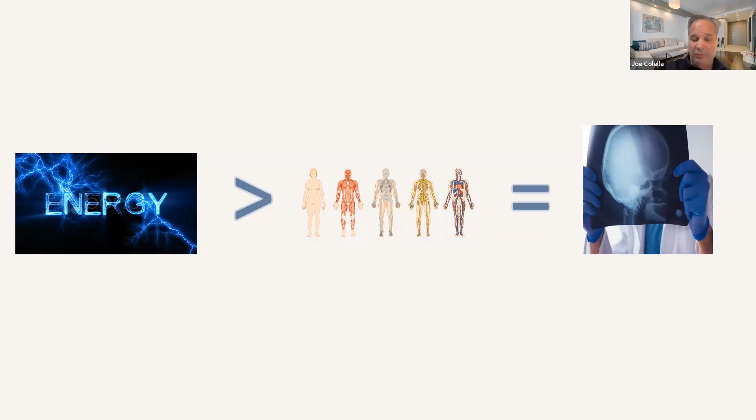So with that said, I just want to give you a mantra to think about as we talk through this: energy, when transferred to human tissue, is what causes injury. That energy can take a lot of different forms—chemical, electrical, mechanical, thermal, nuclear, gravitational. We're going to focus, in this session and whenever we're doing child passenger safety, on crash energy and crash force. That's really what we're trying to solve for: how can we control that energy, how can we manage that energy? And car seats do a great job of that.

But the goal is to reduce the amount of energy experienced by the child, to redistribute that, because reduced energy means reduced injury. That's really what they're trying to do through these designs.

When we're thinking about the innovations and the things that are making differences in the car seat world, there are really three basic areas that cause these improvements, that cause these car seats to become safer. And that is having better innovations from manufacturers mainly, where they're able to design something that either takes out misuse or improves the way crash energy is managed.

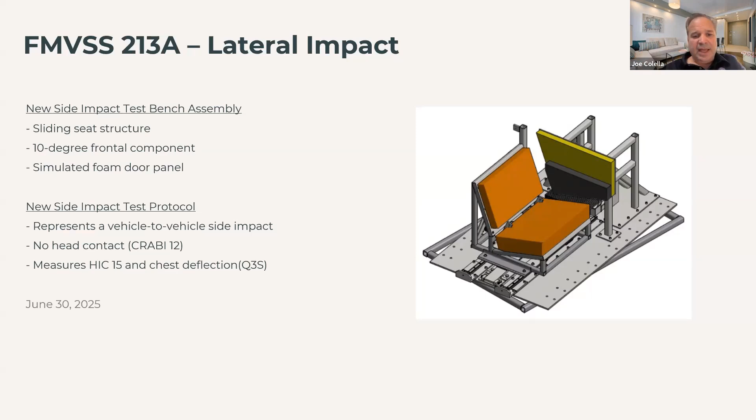So that's coming again in June of 2025. All manufacturers will have to meet that with all car seats made on or after that date. It is not retroactive. And then in 2026, December 5th of 2026, about 2 years from now, we're going to see a new frontal impact standard.

Really what NHTSA has done is they've changed the bench, and you can see an image of it on your screen. The current bench where car seats are being tested is based on a 1974 Malibu. We're not seeing car seats in 1974 Malibus any longer. So what they've done is they've looked at current vehicles, and the current seat back and seat slope angles are one thing they looked at. They found that current vehicles have thinner cushions and denser foam instead of really fluffy cushions like they used to have in the 1970s. They're also going to be testing with a lap and shoulder belt instead of testing with just a lap belt, like they have been up until now.

There are going to be new weight rating guidelines, and I'm going to add one more in. That I already told you about: the 26.5 pound minimum for forward facing and the 40 pound minimum for booster seats. But they're also adding in that a rear-facing only seat or an infant seat rated below 30 pounds, so that's the maximum weight allowed by that rear-facing infant seat, has to be tested with the CRABI 12-month-old only.

If they want to rate higher than that, so a 35-pound infant seat or a 40-pound infant seat, which we as technicians have seen, then they also have to test with a 3-year-old dummy. Most manufacturers that I've interacted with have decided they're going to drop their infant seat maximum weight to about 30 pounds instead of trying to cram a 3-year-old into an infant seat.

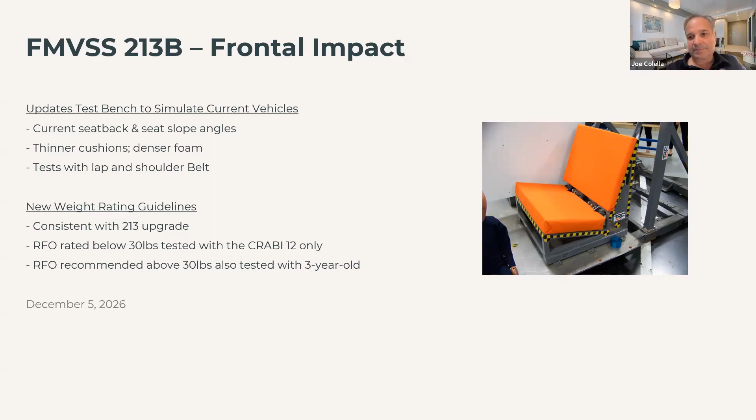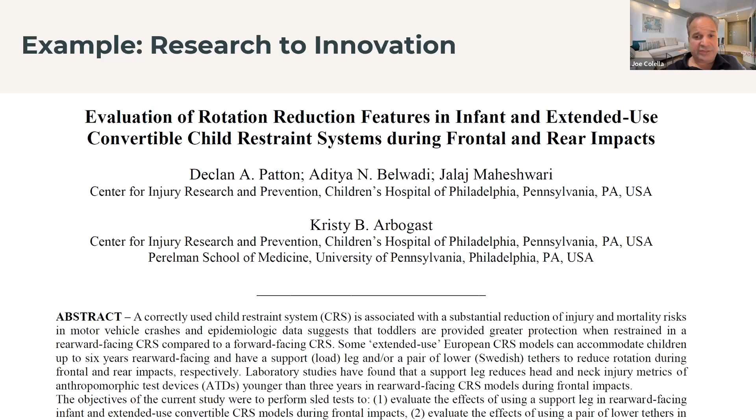Another quick example is research to innovation. This is one of many studies we're constantly looking at that examined rotation reduction features. Those could be load legs that reduce the amount of rotation of a car seat, or other features like load legs to stop the car seat from rotating or control that rotation, or rear-facing tethering. We've seen a couple of innovative models that allow rear tethering for that same purpose, to stop it from rotating.

European shoulder belt routing is another way it's being done, where the shoulder belt is wrapped around the back of the shell. A new study being published next month shows that having the car seat shell in contact with the vehicle seat in front of it has the same effect as a load leg, and can also be useful in controlling rotation and distributing forces in a better way for child injury.

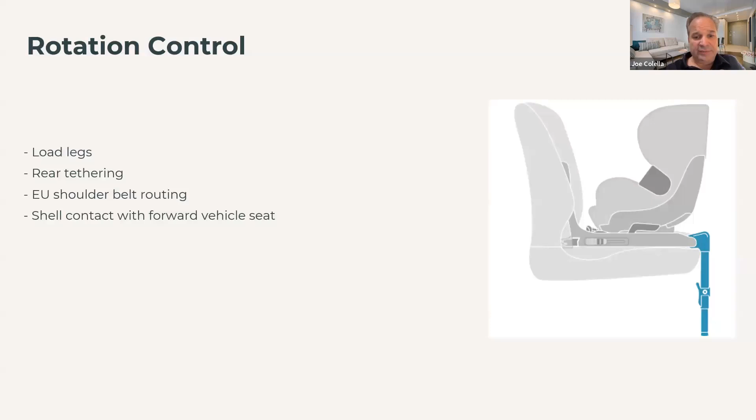Another set of research to highlight quickly is the forward motion of the child seat. We've got lots of research showing that tethers improve the ride down with the vehicle and reduce head excursion that the child experiences. We're also starting to see a couple of models that allow load legs to be used forward facing, and Shai will talk to you about that from his perspective in a couple of minutes, which has a similar effect to tethers, but sometimes in an improved way for certain designs.

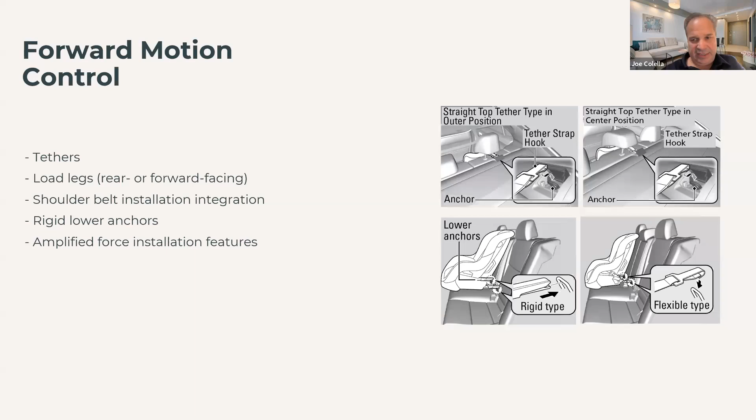Shoulder belt installation integration, where they're going to be testing with lap and shoulder belts both, integrating that shoulder belt into the belt path, so the shoulder belt is high on the car seat, can have almost a tethering effect. Rigid lower anchors mean essentially no motion of the car seat at all, so a very good ride down with the vehicle. Even some amplified force installation features that help us get a tight installation, especially with a seatbelt, can reduce forward motion.

And then ease of use. A correctly used car seat is a safer car seat. So making it easier for parents by using color coding - rear facing and forward facing have different color codes. Device-assisted installation, car seats that help you make it tight without exerting more force. Lower anchor designs that make it easier to attach or detach the car seat is also an improvement. And then improved instructions, which could be interactive instructions or more graphic instructions using pictograms.

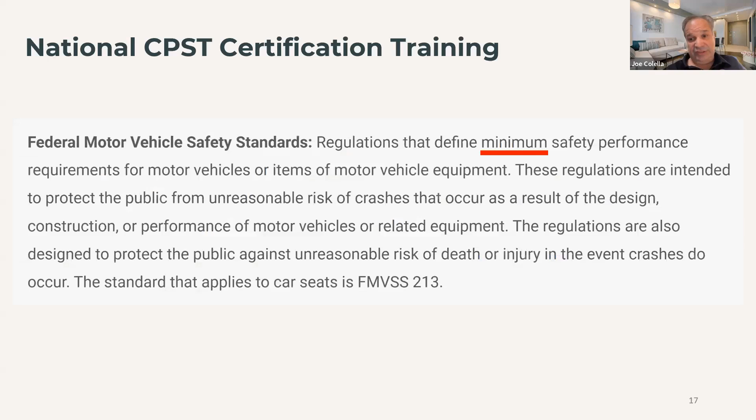Just to put that in perspective, all car seats meet federal motor vehicle safety standards. Some of them go way beyond those minimum standards and make their car seats far safer than required. There are some good resources for the parents and for the techs on this call.

The bottom line is, regardless of what car seat you have, which one you select and which features it has, you have to use it right. And that includes, from the standardized curriculum we learned as technicians, selecting the right car seat, facing it the right direction for the child and for the car seat's design, locating it in a place appropriate for crash protection. So it could be the rear middle, back, or definitely the rear seat away from airbags.

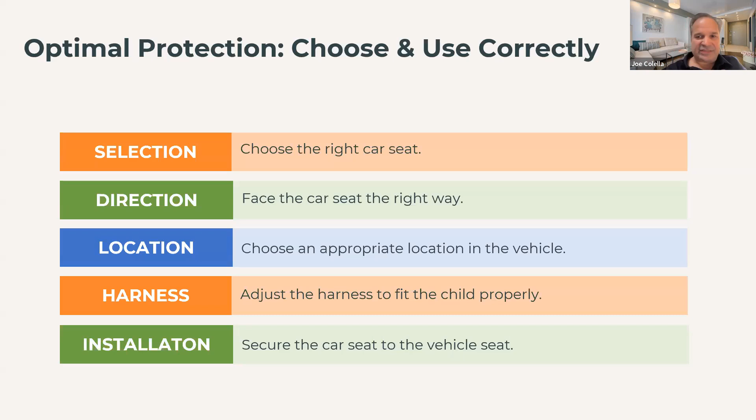The harness has to be adjusted to fit the child properly according to the instructions. Car seats are designed and tested a certain way, and that's what the instructions reflect. Installation has to be appropriate the way the car seat manufacturer said to do it, and also the way the vehicle manufacturer said to do it. So that's the key, regardless of what car seat you're using.

So with that, I'm going to turn it over to Shy, the president of Babyark, and let him talk to you about how they're applying these concepts that I just talked about.

All right, thank you, Joe. Thank you very much. So before diving into the presentation, I'm Shy Mindel. I'm the CEO of Babyark. I'm 45 years old, I have 3 kids. My background is I'm an aeronautical engineer. I actually started another company that designs and manufactures energy absorbing seats for military and aviation applications.

Based on that background, we thought, why not take the technology that we invented for aviation applications, for example, and put that in car seats. So the purpose was to simplify the installation, to have a better ease of use, and to implement some new technologies into the protection of the kid.

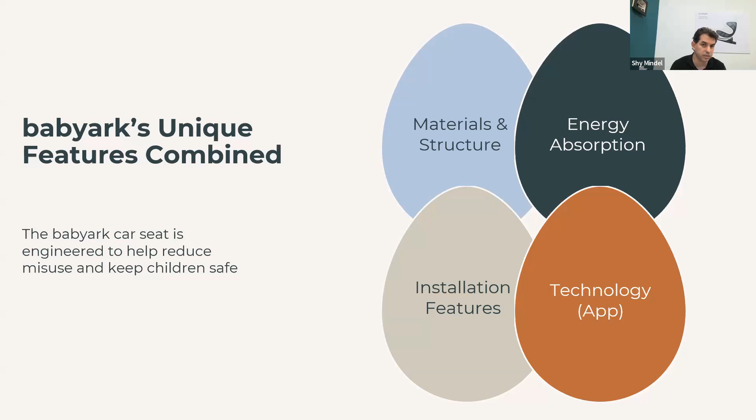I'll try to elaborate a little bit on what we're trying to do here on the car seat design. We are focusing, on the Babyark car seat, on the energy absorption, the materials and structure that support that, installation features that help you minimize misuse, and as Joe mentioned, a correctly used car seat is a safer car seat because it's actually used as tested, so that's super important, and how technology today can help us with everything, with the usage of the car.

So I want to show you a few things. As I mentioned, I'd say we specialize in energy absorption. We invented a new energy absorption technology, and I want to show you how it works.

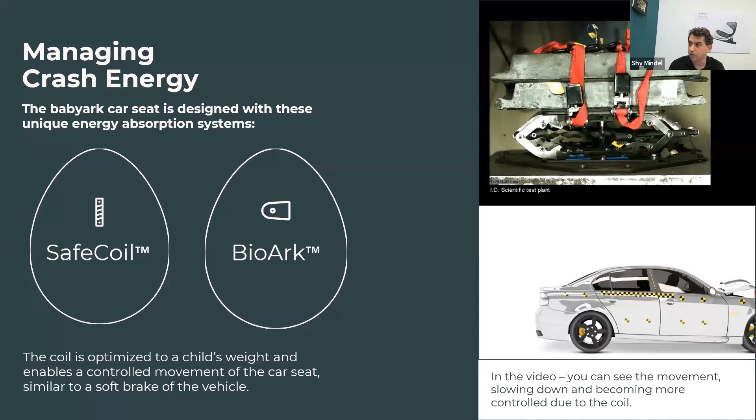So we implement the technology in the car seat. On the top, you can see a video. You can see this is approximately 220 pounds of weight. I'll show it again: you can see how the energy absorbing element is extended, and how it reduces the speed and gives a softer absorption of the weight. That's what we're implementing in the car seat itself.

You can see during an accident there is a base in the seat, and we'll discuss that. So the base includes the energy absorbing element, the same element you've seen before, and it absorbs the energy during a crash. Think of it like a soft brake versus a hard brake of a car, or a crumple zone. Basically, you want to divert the energy to different elements around the kid. The amount of energy in every crash is finite, so if you can absorb the energy with other elements, it's going to reduce the forces transferred to the kid. So this is the main element responsible for reducing the energy or forces transferred to the kid in a frontal impact.

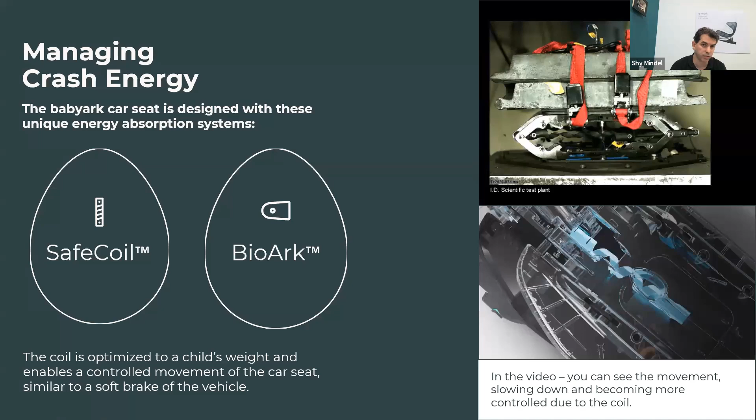Now, the way we do it is basically the technology allows us to optimize the performance of the energy absorbing element. Again, just like a crumple zone in a car, the crumple zone is designed for certain forces, for the mass of the vehicle, and the adults that we want to protect inside usually.

So what we wanted to do is optimize an energy absorbing element that can fit kids from newborns to 6 years old. What I'm showing here is basically we have a lot of control over how the energy absorbing element behaves, and we can do that through simulation and testing. This is what we've tried to do to optimize the performance for newborns to 6 years old.

So the criteria, according to the regulation, is exactly a HIC level of 1,000, and the lower it is, the better. What we're showing here is that we are approximately 75% lower than the requirement by the regulation.

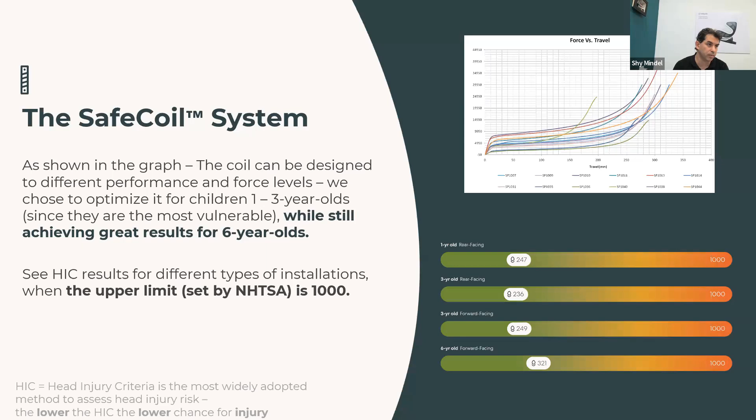What we want to do is find an optimized place for kids between 1 year old to 6 years old. In the design, we try to provide better results for smaller kids because they're more vulnerable. Head injury is more predominant with kids, so that's what we try to do with smaller kids.

Another aspect is side impact protection. This is one of the more common accidents that we can see. Regulation addresses that, and I think it's super important. What we try to do is kind of biomimic a very good solution.

What you see here is the internal structure of a woodpecker. A woodpecker has an amazing brain protection mechanism that diverts a lot of the forces around the brain. You have a spongy bone that distributes the forces, reduces the forces on the woodpecker's brain, and basically woodpeckers can peck the tree thousands of times a day with no brain injury.

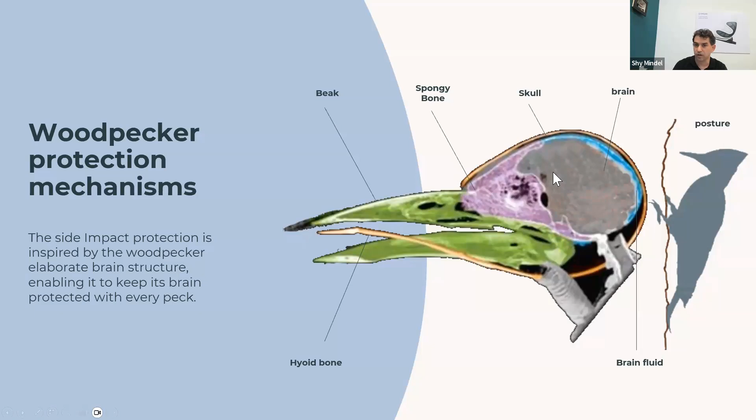If you think of football players, you know there are internal concussions, and that's something we wanted to implement in the car seat. I'll just show very briefly how it looks.

During a side impact, we have an energy absorbing element. It's kind of a wing, you can think of the beak, that is protruding to the side of the door. During an accident, that absorbs the energy and diverts the forces around the kid to the side, and reduces the amount of energy transferred to the child.

There is more to that, but this is just a small demonstration of how it works.

Now it's very important for the seat to be correctly installed. It's very important that the forces are diverted to the energy absorbing element in a controlled manner. So what we wanted to do is rely on proven methods to connect the car seat to the car. We wanted to isolate the car seat as much as possible from the car itself, because if we're relying on vehicle cushions that can change from manufacturer to manufacturer, we're not going to have constant performance in each crash.

So what we're using is elements that are proven to improve safety. We're using a support leg as an anti-rotational element. We have rigid lower anchors combined with a seat belt for redundancy, and an anti-rebound bar that improves stability and prevents rotation on rebound or rear impact.

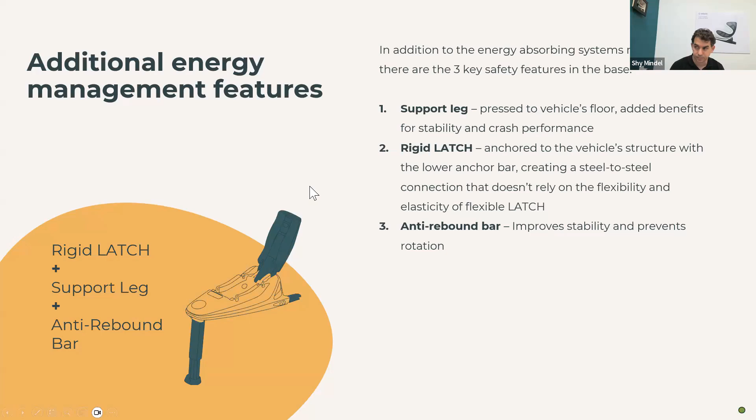The redundant seat belt can be used. It's not common, but it's used in several car seats. The Clek Fllo allows that. The Nuna Pipa and us allow that kind of installation.

The redundant seat belt is Joe's area - you want to elaborate a little on that?

When LATCH was being introduced, there was an International Standards Organization working group for LATCH, a group of manufacturers that were asked: is there going to be a problem with using the seatbelt and LATCH together? The three concerns they came up with at the time were: the possibility of LATCH hardware contacting the vehicle belt and buckle, causing the webbing to fray or weaken over time from rubbing; the possibility that the vehicle belt and LATCH anchorages might not be collinear, coming from different angles, which could change the performance of the car seat; or the possibility that using both would make the installation too stiff, so it would not perform the way it was intended. So those were their concerns at the time.

And Shy will talk to you about why that doesn't apply here.

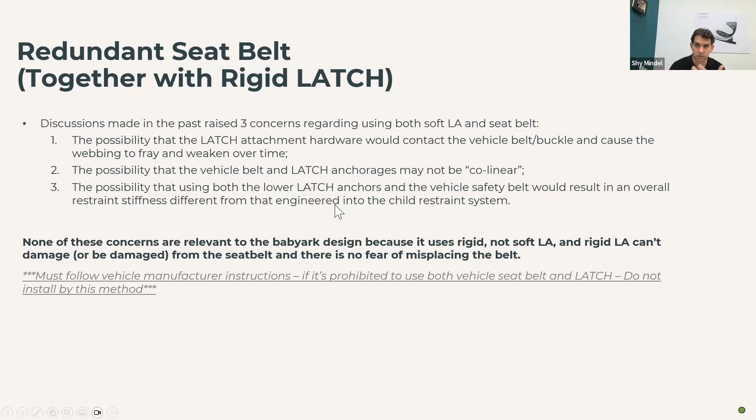None of these factors apply to BabyArk. It was tested for a redundant installation. We have a very clear tunnel for the belt, so there is no way for interference between the rigid lower anchors and the belt. The car seat needs to be designed in order to be installed like that. It has no interference, and it actually adds safety. This is why we want the redundant installation.

Now, what we try to do in Babyark is try to implement the best practices of installation, energy absorption, in order to kind of provide a safer solution, or as safe as we can.

So we are using rigid low anchors. We are using a support leg. The support leg is used instead of a top tether, and I'll show that in a crash test, but the seat does have a top tether because we must have that in order to comply with the regulation. So you can install that with a top tether or with a support leg. Both of them are good. Our test results show that support leg provides better results, and I'll show you why.

High rear facing limits, rear facing installation kind of distributes the forces better on the child's back, so it's recommended. We have the same installation for rear facing and forward facing. The base is the same. I'll elaborate on that, it's a smart seat. It has 14 sensors that guide you through the installation process in order to minimize misuse. And we're trying to use the best practices regarding the instructions from NHTSA about the weight and etc.

So the rigid low anchors provide stability. It's a steel-to-steel connection to the car. And what happens during a crash? We have the same forces transferred to the energy absorbing element in each crash. So when you have a webbing, the webbing itself extends a little bit. So the tension is different, so it's going to extend differently. So it's going to affect the crash performance, and it's kind of depending on the user who installs the seat. So we try to minimize that. It's going to be very repeatable, and that's why we like the rigid lower anchors and the way it's connected to the vehicle.

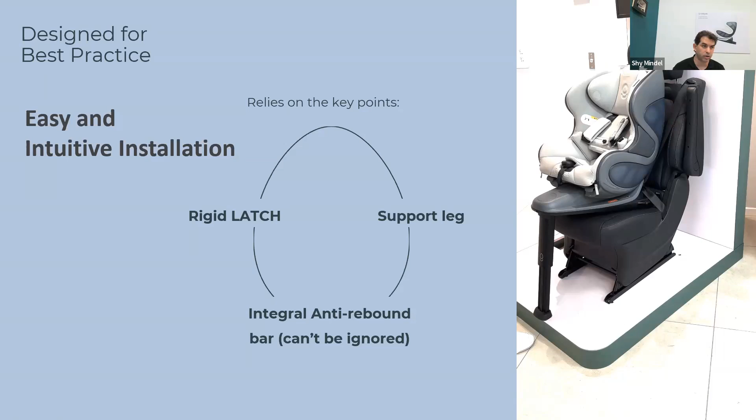We have the rigid lower anchors, the support leg, and the anti-rebound bar. All of them perform in both forward-facing and rear-facing installation. Now the app is here to support, and I'll show you.

This is the installation process with the app. The app is here to guide you through the process, and the installation is exactly the same. Pick up the base by the handle and let the stabilizing load leg fall into its locked position - it gives you the instructions. Secure the vehicle seat, and it gives you a push-button confirmation after each step.

Route through the belt path and buckle the seat belt. Since it's connected to an external element, the buckle, you need to manually approve that you've buckled it. Make sure the seat belt is tightened and locked - we're going through the process of correct installation. Press the button to activate the anti-rebound bar. Pull and extend the lower part of the leg to secure it to the vehicle's floor.

Place the seat over the base in a rear-facing position. If you put the child's age in the app, it will instruct whether it should be rear facing or forward facing. If the child is too young and you're putting it forward facing, we'll alert you that this is not the correct installation. The app is here to assist and guide you if you're not sure what to do, giving you the next steps and confirmation that everything is correct.

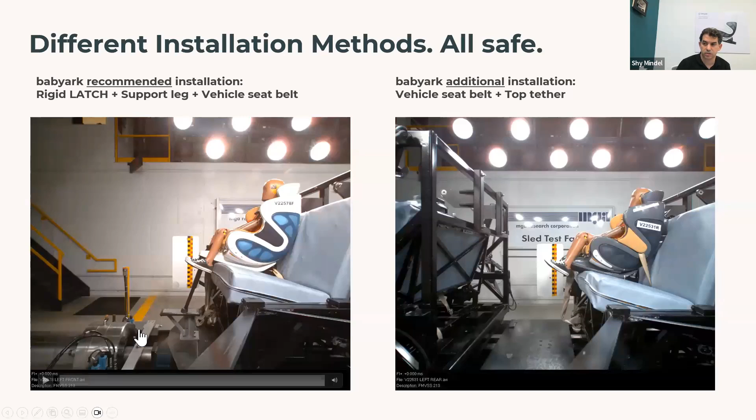I want to show you why we recommend the installation method with lower anchors and support leg. I'll start with the crash video on the left. Both cars in the crash video have 6-year-old kids. I'll stop a few times to guide you through. You can see the base is very stable, kind of floating above the cushion. We don't care if it's a Malibu 74 or a new Tesla Y. We're floating above that, and all the forces the base is designed for are maintained inside the base.

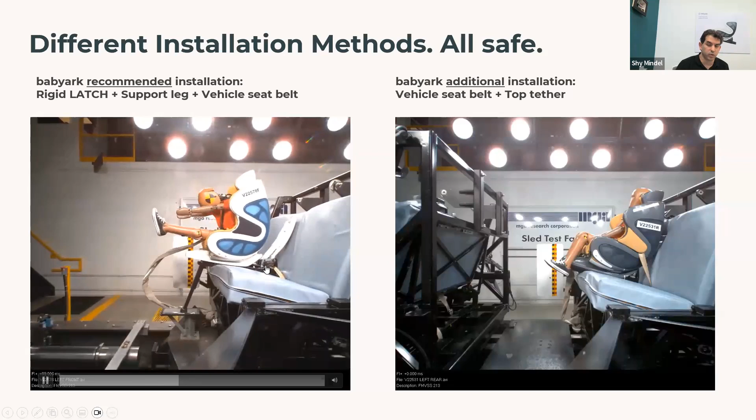Now if you look at the rear of the base, you can see how it moves forward. The white part separates from the black part, and this is where the energy-absorbing element comes into play. We have 4 inches of movement, it elongates, extends downward, and absorbs the energy, so the forces transferred to the kid are lower.

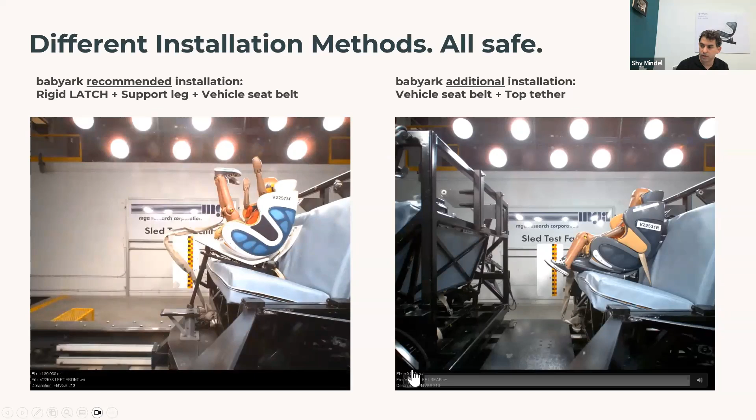If you look at a top tether and belt installation, you can see the belt stops the seat in place, so it doesn't allow that extra movement we want to absorb the energy. Think of it like a soft brake versus a hard brake in a car. A soft brake takes a longer distance but results in lower forces on your body. A hard brake has higher forces but stops momentarily.

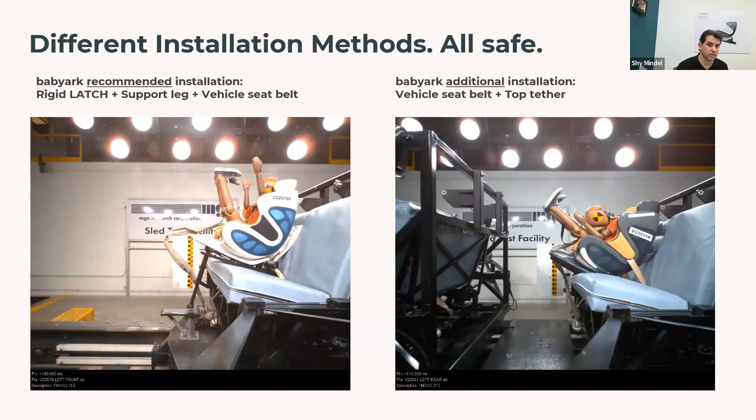So the more we can extend the down ride, the better. We're limited in how much we can do that because of limited space in the vehicle, so we're allowing only 4 inches.

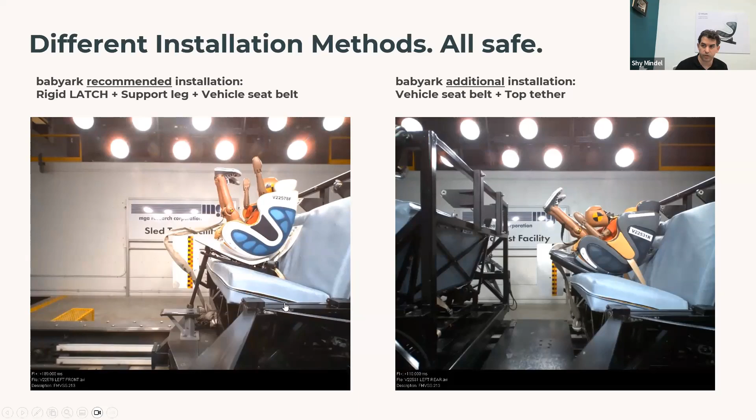Another aspect where technology comes into play is the Hot Cars Act.

Joe, I think we can hear you. Can you hear me? Yeah, now, yes.

According to Kids and Cars, a leading heat stroke prevention organization, as well as noheatstroke.org, a website funded by NHTSA, we're seeing too many kids being killed or dying in hot cars. At least 7,500 kids have been left alone in hot cars or accessed vehicles on their own since 1998 to 2020. Of those, we've lost over 1,000 kids, including 32 so far this year.

The Hot Cars Act was incorporated into a larger bill and passed in 2021, signed by President Biden, requiring vehicle manufacturers to have an alert system reminding people to check the rear seat for children, using methods that haven't been determined yet. NHTSA had until November 2023, according to Congress, to implement that standard, but the research is still continuing, so it's not ready yet.